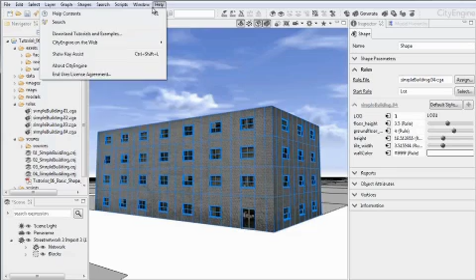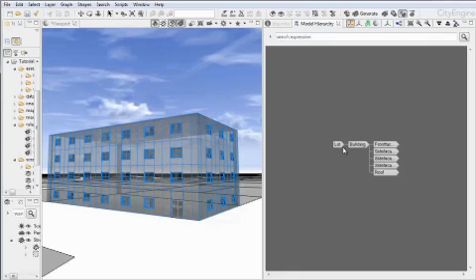So I'm going to select this building here, open the model hierarchy, this window here, with first a dark gray canvas. Then I'm going to click this button here, which is the inspect model mode. So I'm entering the inspect model mode, and now here in the model hierarchy you see that a few nodes have been generated or visualized.

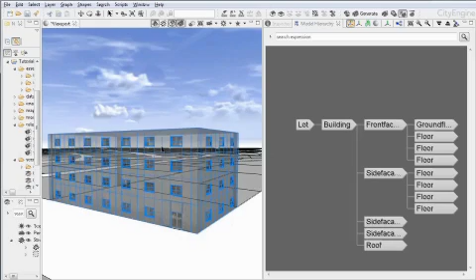So if I'm zooming in, we see that we have a building, front facade, side facade, and so on. This is actually the way CityEngine created this 3D model in the viewport according to the CGA code, which was applied to the footprint with a rule file.

So if I'm opening the rule file here by clicking on the rule file link, I can visualize the code in here. We have seen before there's a node-based or visual representation of the rules, but there's also a text-based one, and this is the one I'm going to use for the code creation.

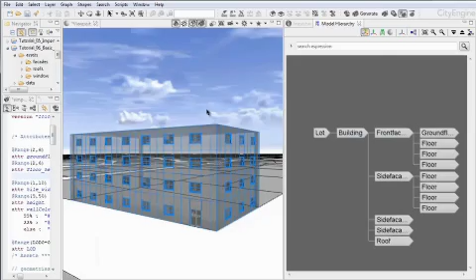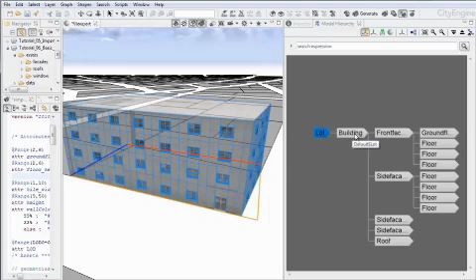So the scope can be either two-dimensional or it can also be three-dimensional. Actually it is always three-dimensional, but the scope is one of the most important concepts which you have to understand if you want to learn how to code CGA.

Now here you see the little GUI button which activates and deactivates the shape scope visualization. Then there's the shape pivot, which is currently the same as before, so nothing changes there. And then there's also, a little bit more advanced, the trim planes visualization in here.

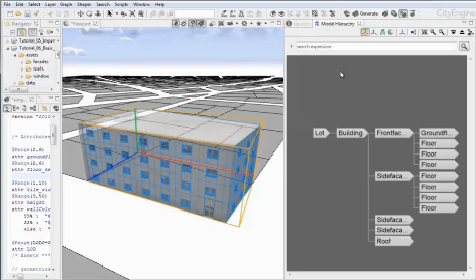So let me quickly hide, let's do it like this, hide all the rest, and quickly create a new rule file. I'm not going to save this one, but I'm going to create a new rule file from scratch.

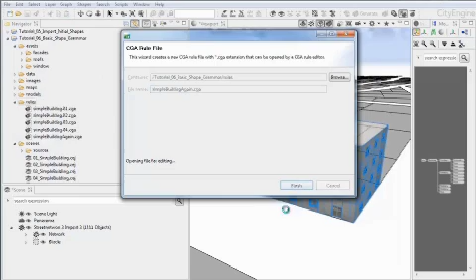So this is the simple building again.cga, and I'm going to use this on one of the lots right next to this building. So I'm going to use this footprint here, and I'm going to assign the empty rule file to this building. I'm getting a little error, but that's okay.

So let us start with the start rule. @StartRule, and I'm calling the start rule lot. This is usually the very default. So I'm going to just write X dot here. This means that I'm writing all the geometry from the incoming shape into a new shape, and I'm naming this shape just X. The point usually means that I want to stop the execution at the end and don't continue.

We're going to use this a lot in the upcoming minutes. So I'm going to save. Actually, let me add here a color operator and say color RGB, so that must be red, and select the building here, the building footprint, and press generate.

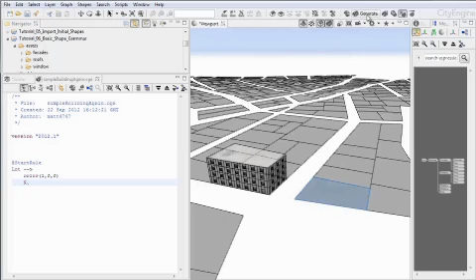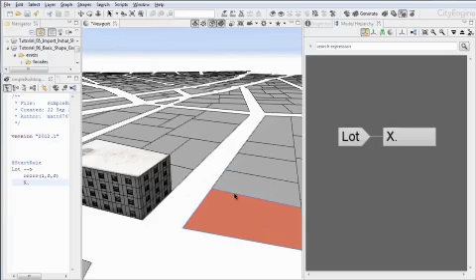Now I can do the same thing with the model hierarchy in here. So let me select the model here, go into the inspect model mode, and here you see we have lot, and then we have X as the final geometry which is written out or which is visualized in the viewport.

Now obviously if I went in and would rename this to ABC, save the rule file, regenerate the model, this here would adapt.

Okay, so let's go ahead and create our first attribute here. An attribute called building height with a default value of, let's say, 20 meters. Now, how can I actually create a building which is 20 meters?

For this we have a specific operation which is called extrude. So I'm going to extrude in the vertical direction.

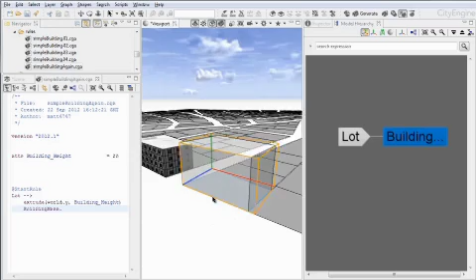It's world.y, so it's extruding exactly vertically up, and I'm going to use this attribute as the value. Save, and I'm going to name this mass, or let's call it building mass, and save the rule file again.

And regenerate the model. Now you see that we have lot and then we have building. Okay, so that makes all sense. So let's continue. The next thing, actually let me continue and create a new rule. You see that any number of rules can be generated, and I can just go on and pass on rules or call different rules from any point in my code.

So in here I'm using another operation, which is the component split, and this actually splits off different faces based on some inputs. I'm going to choose all the side polygons of this mass and name them facade, then I'm making this vertical pipe sign which says I want to continue, and then I'm going to choose top, and the top will obviously be a roof.

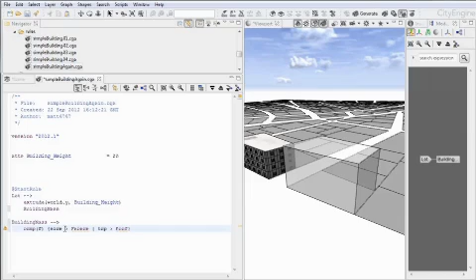So what we have done here is, from the geometry which was created, we've selected all the side faces or shapes and defined them as facades, and all the top polygons, there's just one. There would also be a bottom one, but we're not calling this, so that shape will get deleted afterwards. The top shape is roof.

Now you see here I did not put a point here, and on the left hand side we get a little warning, so that means undefined rule roof. That doesn't matter, I can easily go and continue and generate the building again, so nothing will happen. It's just because these rules are not defined as a rule themselves. So this is a rule definition and this is just missing.

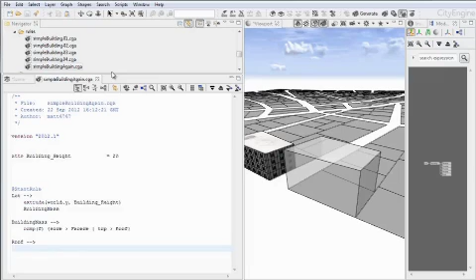So I'm just going to continue with the roof here, and I'm going to go ahead and directly finalize the roof. In the assets folder here, under roofs, we have a roof.tiff. I can visualize this file right here, and you see that it is a picture.

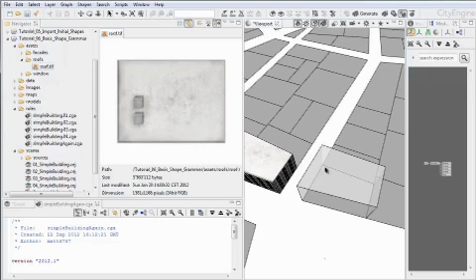So this is a roof picture, and I want to use it and map this directly on top of the building as a roof. It's a very simple roof, so I'm going to use it just that way.

So now I can drag and drop this roof.tiff into my rule, and since it is recognized as a texture, it will automatically create the appropriate CGA code for me with the correct path for the file.

So this is perfect. Let me go in and add something more, because CityEngine does not yet know how I want to project this building onto the geometry, so we have to define this. And for this there's also another CGA operation, and this is called setupProjection.

Sometimes it may happen that you don't know the precise name of the operation. So you can also go ahead and just write a few of the characters and then hit Control+space, which triggers the command completion. This can also save you some time.

So I'm going to double click it, then I'm going to define the UV set, which is the first UV set for the color map. Then, in this case, I'm not going into all of the details, so otherwise you wouldn't have to learn anything more.

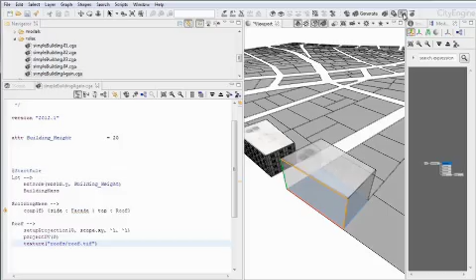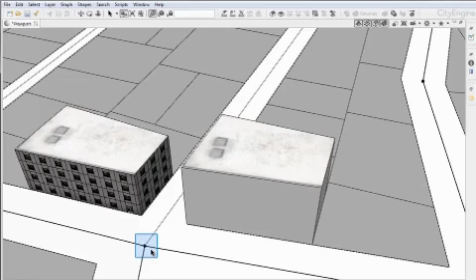There you go. I went out of the edit or inspect model mode, and here you see that the picture has now been mapped on top of my building. So if I'm editing the building footprint, I can just select the underlying road network, and the whole building will be restructured or regenerated immediately, adapting all the textures and all the side facade polygons.

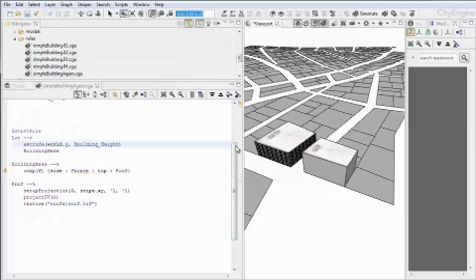Now I'm not going to dive into too much technical detail, because this is just a simple introduction, but what I wanted to show you is again the setup projection in scope.xy.

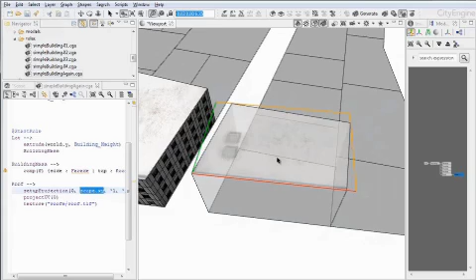If I'm entering the inspect model mode and selecting the roof shape here, you see the scope is visualized. Scope.x is always red, and scope.y is always green. So I am projecting this image in this plane, the scope's red and green plane. The dimensions I'm using in the horizontal direction are exactly the same as scope.sx as a length, and also the same as scope.sy in the height.

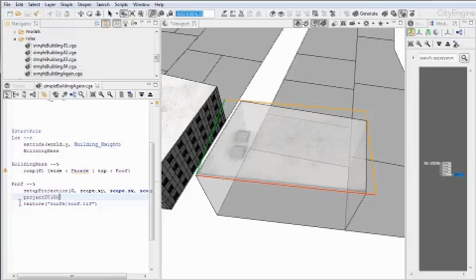Then I'm applying or baking down the UV coordinates or the projection information into the polygon of the roof, and then I'm assigning the texture.

So let's continue and work with the facade. I'm not going to perfectly lay out the code, so I'm just going to continue here. Often it may happen that you have a different floor height on the ground floor than on the upper floors. So I'm going to create another attribute called ground_floor_height, which in my case is 5 meters, and then another one, upper_floor_height, which is just 3 meters. So we can distinguish between these two geometries, or between the heights, visually a little bit better.

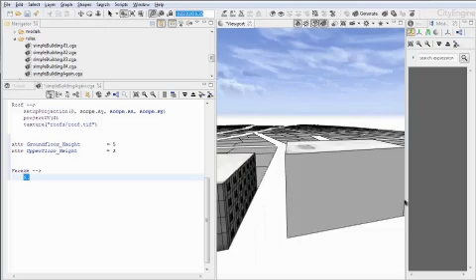Now the facade, what do I want to make with the facade? Actually I want to split it into different floors, but at the moment, as the geometry is, I want to make a little bit of room on the side, or split two shapes off at the very edges of the wall or of the facade, to just have some more space between the edges. So I want to go ahead and split two parts off of the sides of the facade, just to make a little bit of space between the edges of the actual facade.

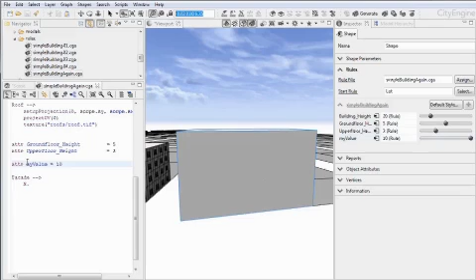So I'm not going to define this as an attribute, and by the way, when I'm visualizing the rule in the inspector, you see that all the attributes I have defined are now available as attributes in the inspector. So if I write a function, for example, like myValue equals 10, save the rule file, you see that this value does not appear. But if I define it as an attribute, attr, save the rule file, then you see it appears in the inspector as an attribute. So I'm not going to use an attribute in this case.

I'm going to define wall_side_part_width, which is, let's say, 1 meter wide. And I'm going to use this in my next split, and I'm going to split this facade.

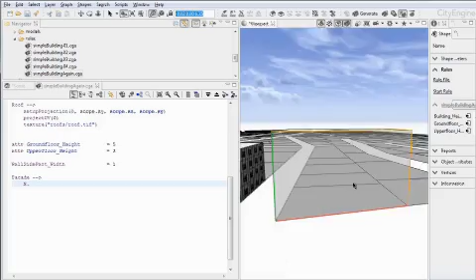So let me enter the inspect... oh, an error. Let me fix this quickly. There you go. Okay, let me enter the inspect model mode again and select one of those side faces here. Now you see again we have a red line and a green line, so that means this is scope.sx and scope.sy.

So I'm going in and writing split in the X direction because I want to split in that direction, and then I'm going to say the wall width part on the side, which happens to be a wall part—not explaining all the details here. Then I am writing tilde 1, which means, let's say, facade_main, and then again I'm going to create this part here.

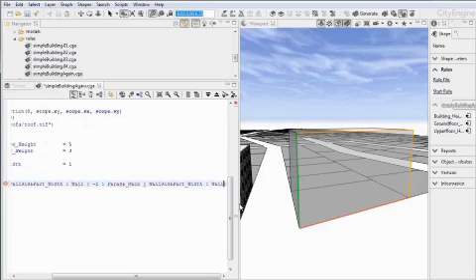Save, regenerate. Now you see what happened here. On the left side a wall part was split off. Then on the right hand side also a wall part was split off, but in the middle, which is approximately 1 meter wide, this is a floating value where CityEngine adapts the value, so I could also write approximately 10, but it's just a short value since the left and right hand side are already defined. I can just write approximately 1. And this is defined as the facade_main part, which is in here.

So I'm not going to mess with the wall parts again, before texturing them. So I'm going to copy paste the facade_main here, and I'm going to split vertically, split in the green direction. And here the first thing I want to do is split off the ground floor.

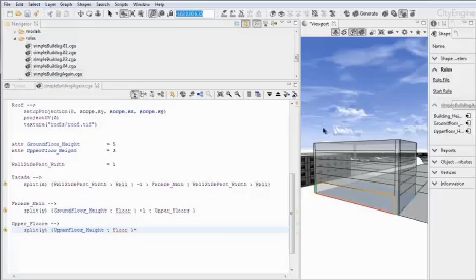And then here's a new sign, a new little functionality. This is the star. So the star means do the stuff inside the brackets, the curly brackets, as many times as possible. So I'm going to save again and regenerate. And now you see that multiple upper floors have been generated. You see that here a little bit better. Let me hide all the shapes.

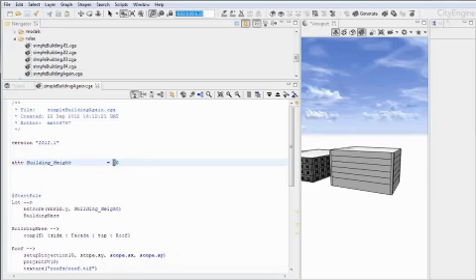Okay, now the beauty of this whole process is obviously that if I'm changing the incoming building height to say 40, it doesn't matter how many floors there are, CityEngine will always update the number or the geometry, and thus also the number of the upper floors. And this is done by this little star sign here. So I'm going back to 20 meters

and regenerate. Okay, now we are at a floor, and let's go in and split the floors, each of the floors again horizontally. Now we can go in and say split X as many times as possible, and let's create an attribute which is the tile_width, which I'm going to define as, let's say, 5 meters. So I'm going to create big tiles in this facade. So let's use this tile width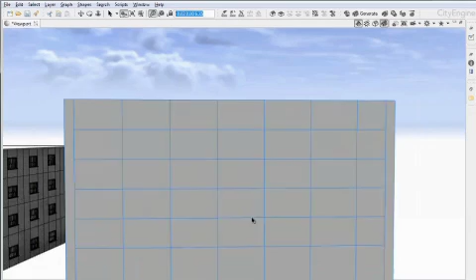and define a tile. Let me quickly show you the difference here. So I'm generating the model, and here you see that we have 5 meter wide tiles here, but there's one which isn't 5 meters wide, and this is because I did not define the tilde sign in here. Actually, let me split in X here. Oh, wrong position. I did not define the tilde here.

So what this does is the tilde together with the star, they will make a certain amount of full tiles which all are the same width. So let me regenerate this. Actually, I messed up the code here. Why? Yeah, now it works again. So here CityEngine again defines how many tiles there are. So let's continue with all of these tiles.

Tile. Now split the tile again. Let's say again horizontally with this structure here, and define new values. Let's say tile side width as 0.5, tile side width, and in between that's the tile_main.

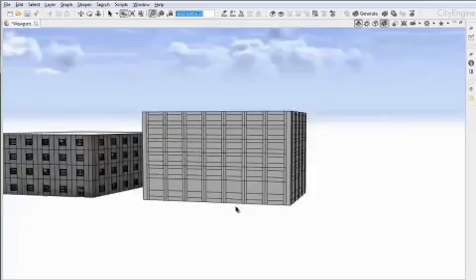and now split off that way, gives wall, window height gives window, and approximately 1 gives, try to guess it, wall. Let's save and regenerate. Now we see that on all of these tiles we have the base height, which is this high, then the window height, and then the rest, which is wall.

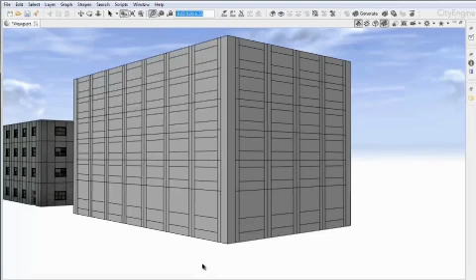Now these geometries obviously have changed since there is a ground floor, or between the ground floor and the upper floor. So let's go in and change one of these widths, which was the tile side width, which maybe doesn't make too much sense. So 5 meters, that should be approximately 3.5 meters. Actually, yeah, that makes more sense. Okay.

And in this case, I'm just going to continue with the window rule in here, and I'm going to texture this again. So let me go grab the window texture, or one of the windows here.

Now I'm going to create a function which gets me one random image. So the text name equals file random in this path. I'm going to copy this, delete this, file random, and put it in here.

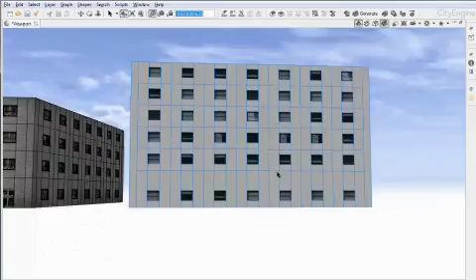Regenerate the building, and now we see that each of those windows has gotten a correct, new individual texture. So now the facade itself looks a little bit uninteresting without the texture, so let's go in and assign a texture to it.

Let's find the facade first. Here is the place where we want to set up the projection, and I'm going to search the image I want to use. Here is facade textures, and I'm going to use simply the brick wall.

Drag and dropping this into the rule here, and also drag and dropping the dirt map into the code here. I'm going to do something with those two pictures. Let me comment out this code here. By the way, you can comment out code with either this pound sign or with two times the division sign.

Okay, so I'm going to use not a full repetition of the texture along the whole facade, but enter a different value. We've seen that the image is repetitive, so I'm going to open it again just to visualize it, and this part is about 50 centimeters high in reality and about 1 meter long approximately. So I'm going to define this.

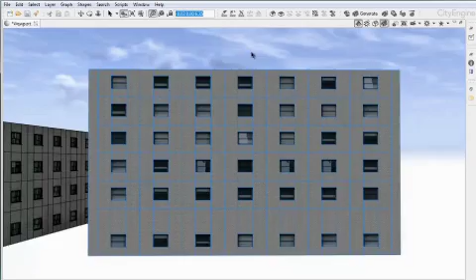This means approximately 1 and approximately 0.5, and CityEngine tries to adapt the number of repetitions of the texture. So I'm going to grab this texture, delete the rest, assign this, and regenerate the building, and now we see that the texture has been assigned and repeated accordingly in the given dimension.

Now I've taken a second image here, which is the dirt map, so I'm just quickly adding in two other lines here. I'm going to basically paste what I had in my clipboard just before, which is these two lines, and I'm going to choose the UV set to 2.

I'm changing the UV set to the so-called dirt map UV layer, and I'm going to copy this here and then set - this is a little bit special - material.dirtmap, comma, and then the image itself. So what does this actually do?

I am saving and regenerating the building, and now you see I have commented out the texture, so what we see only is what these 3 lines are doing. So again, I'm using the full dimension of the facade for the projection on the second UV layer, which is the dirt map layer, and then I'm assigning the dirt map.

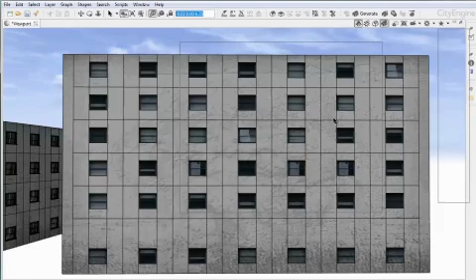And the dirt map actually looks like this. It's quite a low resolution image, but it is adding some dirt, as the name states, onto the full facade. Here it is, the dimension is adapted, so there's always a full repetition over the whole polygon.

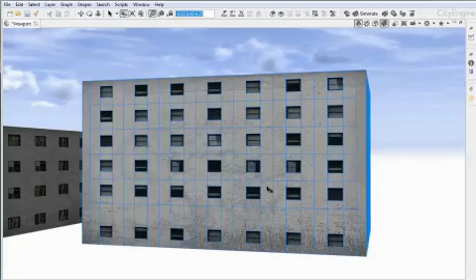So let's go in and reactivate the texture, save the rule again, and regenerate the building.

Now this is already quite beautiful, and we have a lot of different attributes now to play with. So I can go in and for example edit the ground floor height, and you see how the number of upper floors is adapted. Or you can go in and change the tile width, and so on.

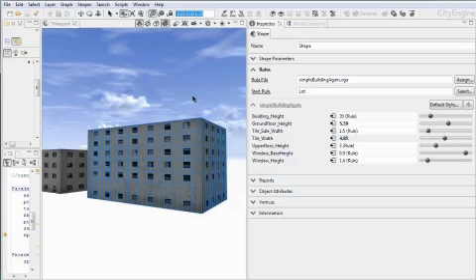Now in the written version of this tutorial, which you find in the scenes folder, there are different ways covered, different elements of how you can write CGA code. For example, there's also a topic about how you can embed different levels of detail. I'm not going to cover all of these steps - it's better that you just work through this PDF. A lot of the stuff will be the same as I've shown you here, but I don't want to spend too much time in this video.